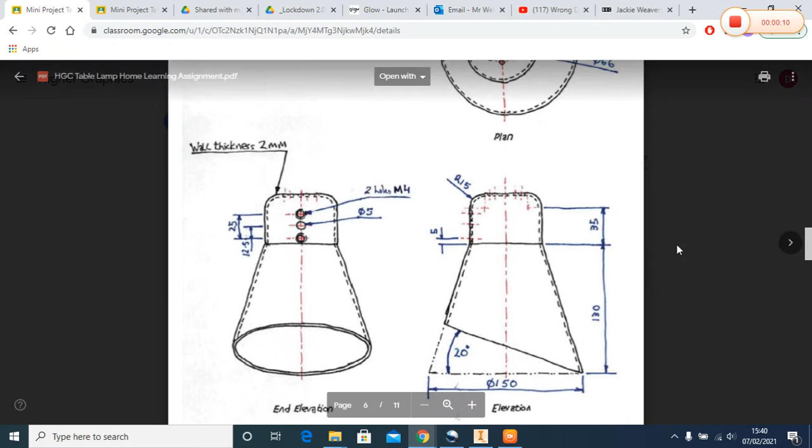So here's our lampshade here. We've got our outside diameter of the part that sticks up the way, and we've got the fillets, but if you notice down the bottom it's cut at an angle, and that angle is 20 degrees.

A couple of people came back with various different ways of doing it, but I haven't actually seen anyone doing it the way that I would expect them to. So I'm just going to explain how I would do it, and then show you a way that a couple of other people achieved it, but it took them slightly longer.

So there's our lampshade. First thing I'm going to do is find a plane that goes through the centre, make it visible, and then I'm going to put a sketch on that plane.

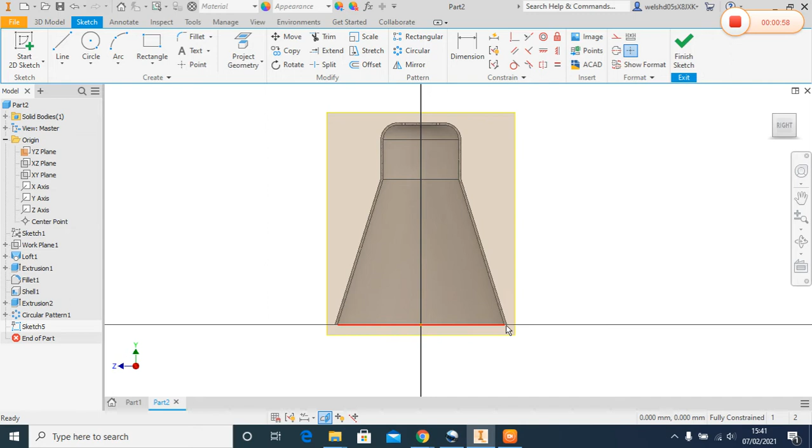Now just to see what I'm doing, I'm going to do a slice graphics down the bottom here, this button, and that slices the graphics. What I want is a line that goes from this corner all the way up and outside the shape with an angle of 20 degrees.

If I go to my line tool, go right down to the corner, make sure it clicks, and then I'm just going to go beyond, and I can see my two numbers flashing here. I'm not too concerned with the length, as long as it's outside the shape I'm quite happy. Then I'm going to tab across, and the angle I'm looking for is 20 degrees back from there, which would be 70 degrees. So I'm going to type in 70, press escape to get rid of the tail, and finish that sketch.

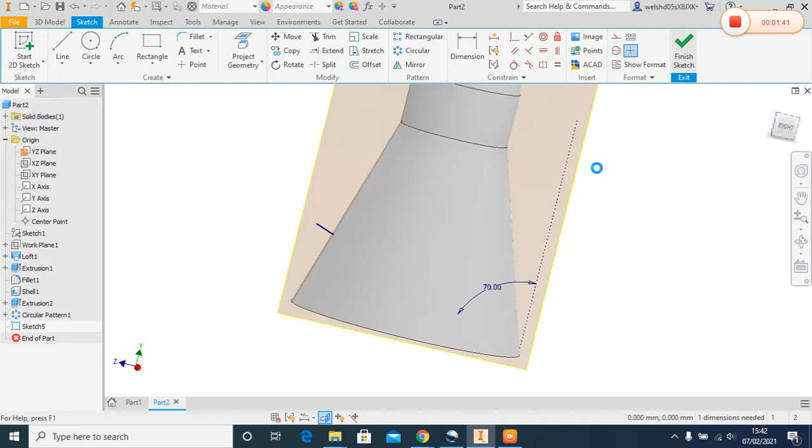So now I've got a line going through the way that I want it. I'm now going to use the split tool, which we have used before.

Now I'm using the 2021 version of Inventor, so it's a little bit different here, not exactly the same as we did in school. First of all, I'm going to select the tool that I'm going to cut it with - if I can get it to select... come on, there we go, that one there.

And what I want that to do is split the solid. So I can either split it that way, which means anything in that direction will be cut, or if I click on this one, anything down that direction will be cut. Coincidentally, if I click on that one, nothing would be cut away, but the item would be split.

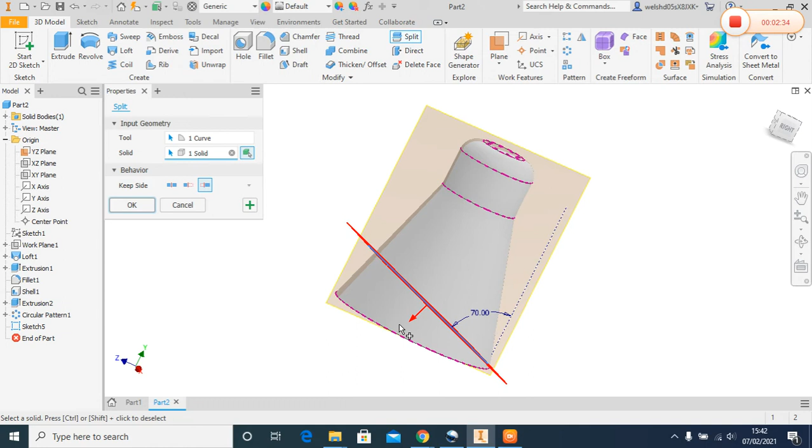So as it says in the little pop-up menu, split the solid and keep both sides. But what I want is anything down this way to disappear. Click on here, off it's gone, turn off the visibility, and as we can see, we've got that perfect.

So all I'm going to do is go back and show you a way that someone else did it. A couple of people talked about using extrusion by subtraction, which you can do.

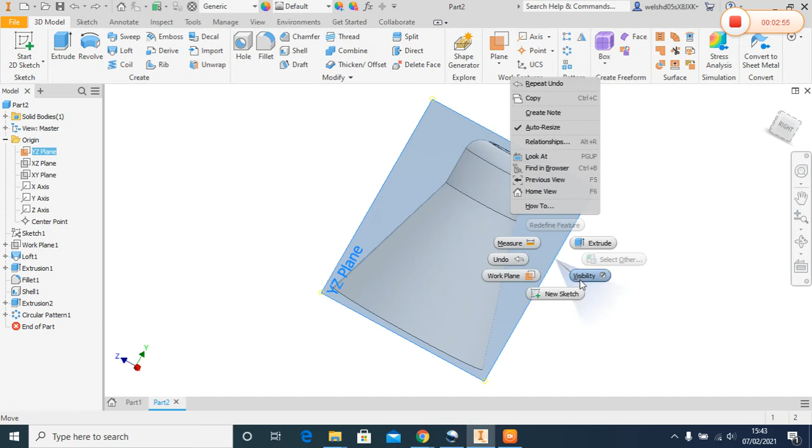So once again, I'm going to put a sketch on this profile, and slice the graphics so that I can see what I'm doing. I'm going to go to my line, start off there, do as before - tab up and go to 70 degrees.

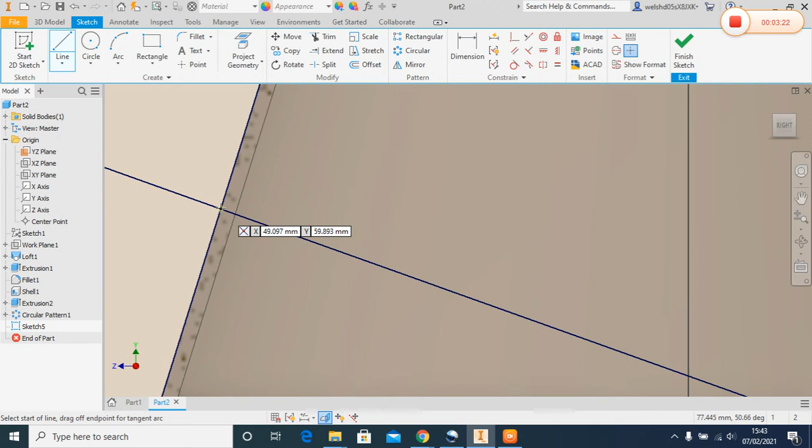Now I'm going to press escape, get my line tool, and join on to that line where it touches there. I'm going to go down to this corner and then across back to where I started, then press escape, and trim off this part here. So I've now got a triangular profile with the correct angled line.

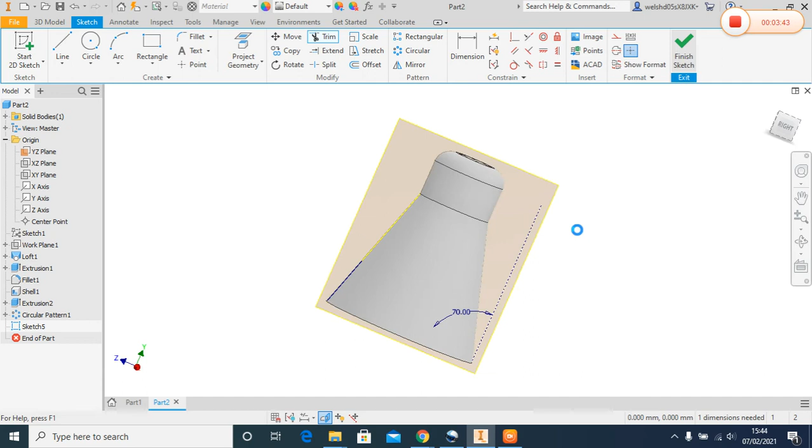If I finish that sketch, then I can go to extrude by subtraction, and I want it to go in both directions, cutting out that way - I'll spin it around so you can see what's happening. So we've got that profile cutting out there, press OK, and as you'll see, we've ended up with the same as we did before, but it just takes slightly longer to do.

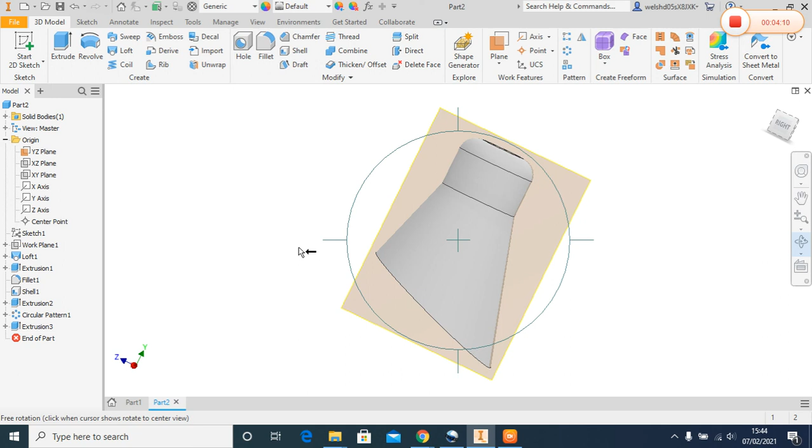Instead of sketching one line, you've got to sketch three. You've also got the danger that the profile doesn't close up and give you a complete closed profile at the end, so there's all sorts of things that could potentially go wrong with that one. The main way to do it, I would suggest, is using this split tool up here - drawing a line through your object, then splitting it to get rid of the bit that you don't want.